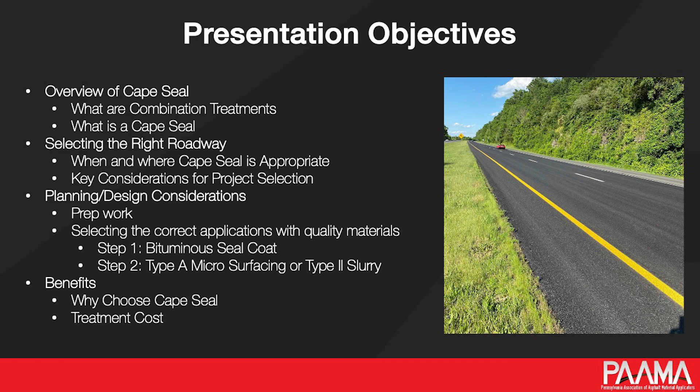With combination treatments, it's not that 1 plus 1 equals 2. Sometimes you do one or two surface preps and then combine it with another treatment. That might not give you double the life, but it's definitely going to give you longer life than if you just did one treatment on its own.

I think that's one benefit this organization brings to PennDOT, we have a lot of tools for you to pick from. The right tool might be based on the condition of the road, might be based on your budget. If you're looking for just a Band-Aid type approach, we have those. If you want something long-term with the exact right product for a road, we can guide you, we can help you pick the right product. But that's the key, picking the right treatment.

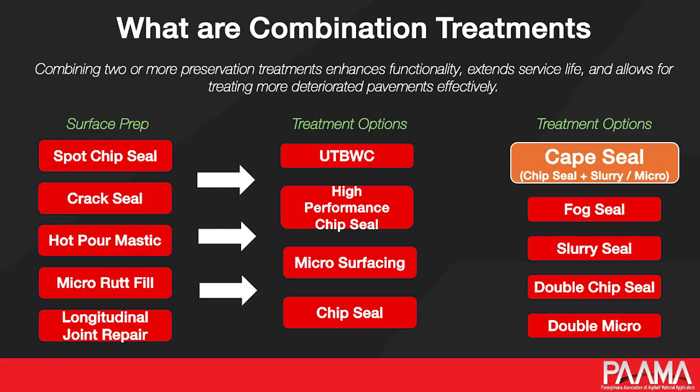Why do you want to use combination treatments? It's going to extend the life. If you're going to chip seal a road and you don't crack seal it first and you have wide cracks, those cracks are going to come back. So you want to use those surface prep treatments to extend the life of the maintenance treatment you select. It allows combination treatments to target multiple distresses.

So to give you an example, for a Cape Seal, you want to chip seal the road and cap it with a slurry or micro, but maybe that's not in the budget. Maybe you say, I just have these few areas that could benefit from a chip seal, so I'm just going to spot treat some areas and then do a single microsurfacing. There's a lot of flexibility based on the budget, the exact condition of the road, and the traffic. And I'd say one other thing is public perception.

Chip seal is the best bang for your buck, it covers the most ground with the least amount of money. But to be able to utilize that chip seal more, that's what a Cape Seal does for you. Now you can use that inexpensive chip seal in areas you wouldn't have considered using it otherwise, higher traffic settings or urban and residential roads.

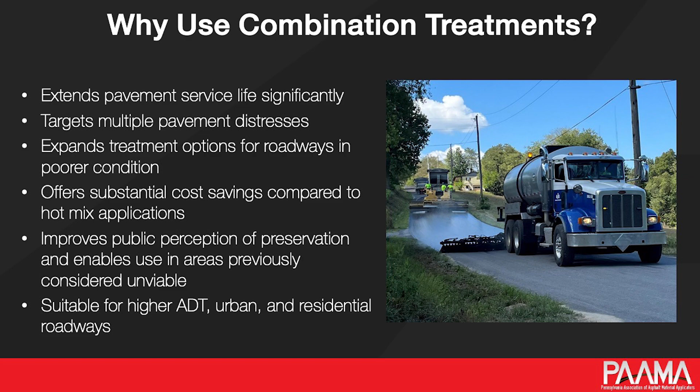But it's basically a two-step pavement preservation treatment. The first step is that chip seal, install the chip seal. Secondly, you're going to sweep it, and then cap it with a micro, or you can cap it with a Type 2 slurry.

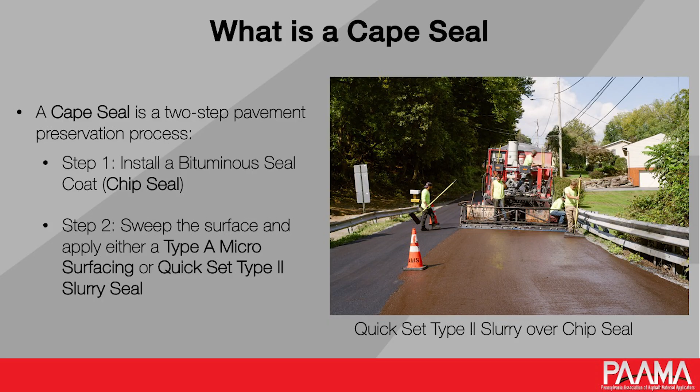The time between the two steps, different contractors may have differing opinions. If you're doing a conventional PennDOT chip seal with a number 8 aggregate, typically you'll like to see that chip seal sit for about a week till the stone gets a chance to embed, till you can sweep it, remove the loose aggregate, and then you could schedule to cap it after that time frame. Of course, everybody wants to cap it as quick as possible. You can speed that up, but I'll get into that later, maybe using a different type of stone that allows you to sweep it sooner. But typically, a week to two is what we like to see.

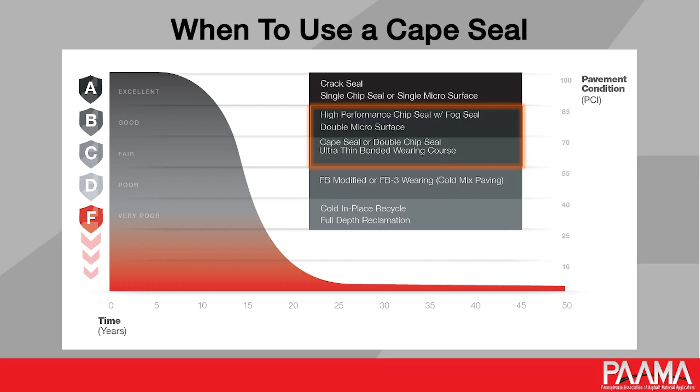Now we'll talk about when to use a cape seal. So cape seals, you're in that B to C range of condition of road. It's real similar type conditions as the ultra thin. The only difference is cape seal is not going to correct profile. So if the road's out of profile, then you're going to choose the ultra thin. If the road has a good profile, but needs a surface seal, and you don't want the chip seal look when you're done, that's when you'd start looking at a cape seal. It bridges the gap between a single chip seal and the ultra thin, it kind of fills that gap in between.

So in a perfect world, you're chip sealing your roads five, six, seven years after you pave them, or you're doing a single micro or some type of single maintenance treatment. If you let the roads deteriorate a little bit further and now there's more cracking on the road, that's when you're going to want to look to a two-step treatment, whether it's a double chip seal or whether it's a chip followed by a slurry or a chip followed by a fog. But you're not to the point where you need a thin overlay. So that's kind of the sweet spot for cape seal.

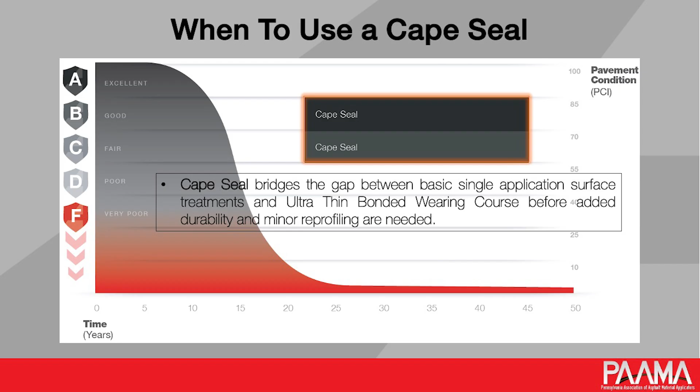These are road conditions, suitable roads. But like I said, it's similar to the ultra thin type roads. I'd say the difference is you want a good profile. A cape seal, when it's completed, will look like a paved road as long as the profile's good. If the road's out of profile, you really should correct that first or pick a different treatment.

So you could do a double micro, you could chip seal, you could do a double micro to try to fill the ruts, but then you just have to do the math and figure out, okay, well, till I chip and do a double micro, am I close to the ultra thin price? So that's where the math part comes into play, but there's a lot of flexibility in all the treatments that we do. So there's no right or wrong answer, but this just gives you more flexibility, allows you to use the chip seal in areas where you wouldn't have used it before.

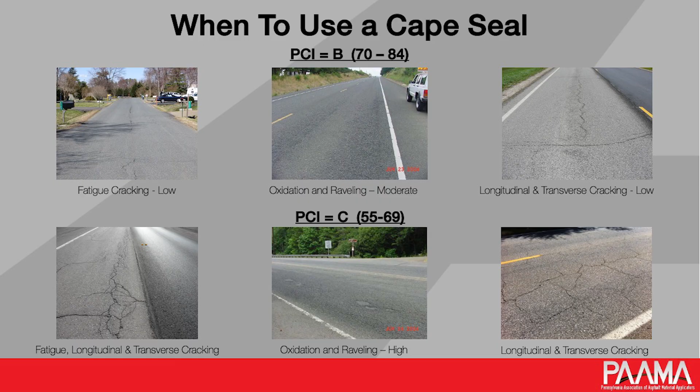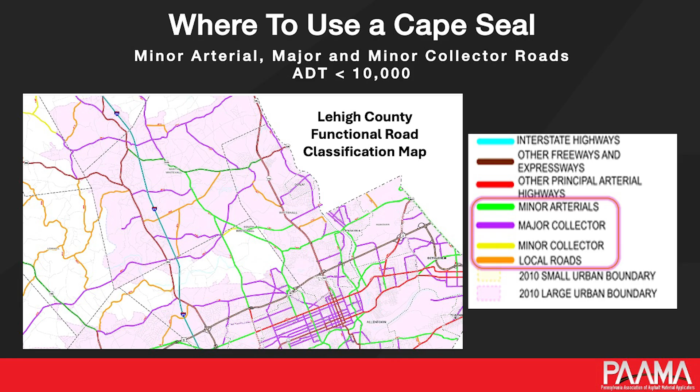You can do lower ADT roads too, but once you get to the lower ADT roads, the best bang for your buck is still the chip seal. So you're looking to expand the usage of chip seal, and the way you expand the usage is by capping it with something else. We say you can do a cape seal up to 10,000. It's going to depend on materials and the exact type of road you're doing, but I would say that'd be about the upper limit.

Here's some examples of where to use it. You've got a minor arterial road, might be higher speed traffic, more of a rural setting. That's a good example.

In Bucks County last year, we chipped and fogged Route 563. So if you think of your 3-digit SRs, a chip with a fog on a high ADT road works, but you could also substitute and use a cape seal, if you want a smoother finish when you're done. If you want something smoother that looks more like hot mix, then you'll go the cape seal route.

Minor collector road, that was a road in Berks County we did for Spring Township. A heavy residential, urban type setting where you get the benefits of the chip seal, but the aesthetics of the slurry and the micro. That's bringing the best of both worlds together. When you combine a chip seal with a micro, it helps to stop reflective cracking.

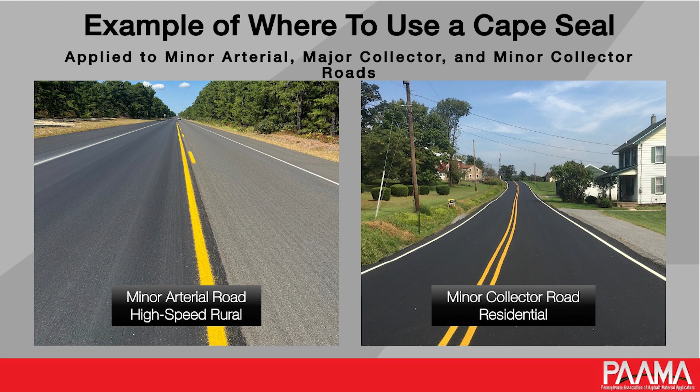If you did a micro on its own, you might be more limited. You want to target roads in the B category that have very little cracking. When you get to roads that have a little more cracking, you can still do the micro in those settings, but do the chip seal first. The chip seal is going to help stop those reflective cracks from coming back.

Working cracks are still going to come back. You can't stop a working crack, so if you have working cracks, you still should rubberize seal those. If they're wide, you're going to want to use the mastic. But all the fine cracks, they won't come back.

Another good place to use a cape seal is if you have a PennDOT road that goes through a town. If you pick any little borough, you've got a PennDOT street that goes to Main Street, that's a perfect type of setting, more of that higher density setting where maybe a chip and a fog on its own isn't as good because there's a lot of on-street parking. Then maybe you take a step up and cap it with a slurry.

You can do development setting roads too, so we do a lot of cape seals for local municipalities, for their development roads. Areas where they need a chip seal, but they don't want the headaches of the chip seal.

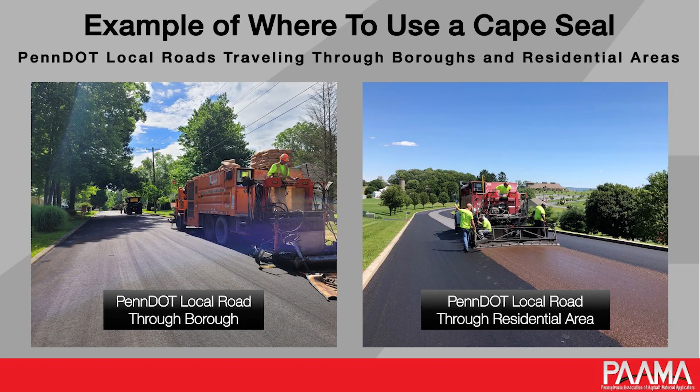As far as considerations, site selection, the key thing to remember is the limiting factor is still the chip seal. So you still got to be able to successfully chip seal that road. Give it time to be swept for the stone to embed till you can cap it with a slurry. That's why we say less than 10,000 cars per day, because you still got to be able to successfully apply that chip seal, sweep it, and then apply the slurry.

It's not a candidate if there's severe rutting, then you're not looking at the right product. If there's shoving or loss of profile, then you got to look for another treatment. Maybe you have to spot level some areas, or maybe it's an ultra thin candidate. So overall, you want the roads to have a good profile to be successful with a cape seal.

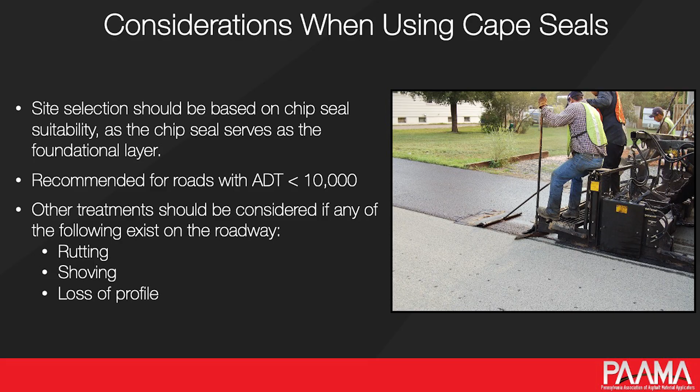Same prep work as ultra thin. Any areas that need base repair, mill and patch them with 19 millimeter. Rubberized sealer for any of the working cracks. Non-working cracks, you don't have to seal, leave those go, the chip seal will take care of those. Hot pour mastic for wide cracks.

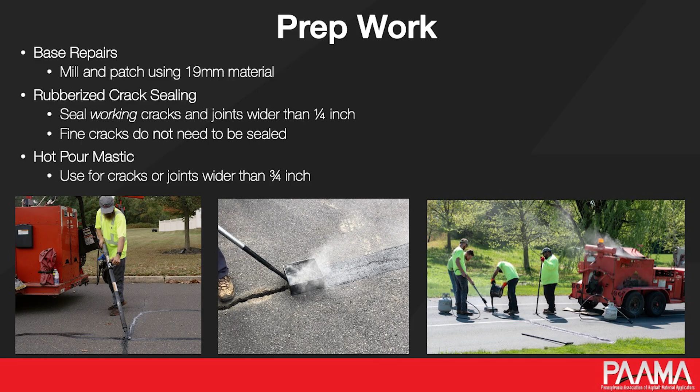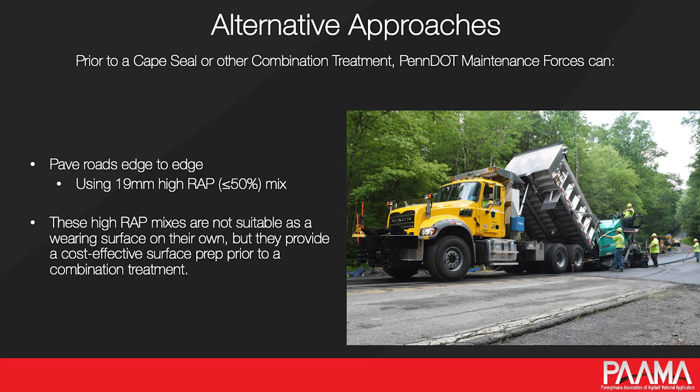Another good place you could use a combination treatment, whether it's a cape seal or a double application chip seal, is with the high-RAP mixes you've been experimenting with. You could use a high-RAP 19 millimeter Superpave mix and then cap it with a cape seal. You don't want to leave that high-RAP mix exposed, so you could use a combination treatment, whether it's a single chip with a fog, a double chip, a chip with a slurry, or a chip with a microsurfacing.

So how many number 8 aggregates are uniformly graded and cubical? Not too many where I live. So if you want a higher performing product, you have to advocate for higher performing materials.

I'd say on a cape seal for roads that get less than 3,500 cars a day, your AASHTO number 8 is a fine choice. There's not going to be any issues. You can chip seal that road, sweep it—traffic's low volume enough—cap it with a slurry, and a couple weeks later you're fine.

If you want to target your higher ADT roads and do that inexpensive maintenance treatment on a wider band of your network, you have to improve the quality of materials. Hopefully we can work together to make that happen.

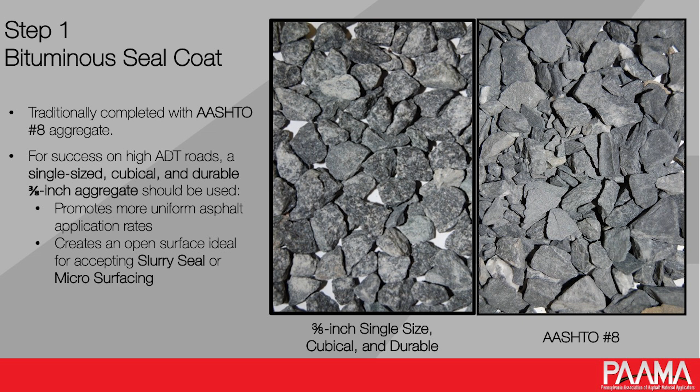But we've been having a lot of success using a single size cubical 3/8 inch aggregate. It's readily available—any producer that produces an SMA, that's a single size cubical aggregate. Any producer that produces the ultra thin bonded wearing course is producing that single size cubical durable stone. So the key is just getting it clean enough to use for a chip seal.

By using that durable 3/8 cubical stone, you have a uniform application rate. With chip seal, you're always trying to pick the nominal size of that stone. So if you have an AASHTO 8 with a 1/8 inch sliver stone, it's going to take a lot less oil to glue that to the road surface than if you have a larger stone that's 3/8 of an inch. So as a chip seal contractor, you're trying to pick the median.

If I glue the small one down, maybe the big ones won't stay. If I try to glue the big one down, it's going to bleed in the wheel tracks. That's the reason you can't use an AASHTO number 8 as-is on high ADT roads—you're going to have bleeding in the wheel tracks, or if you don't have bleeding, you could have stone loss on the edges.

So you want to use a uniformly graded stone where all the aggregates are a similar size, so that way your application rate of emulsion and the design method works. If you ever read the chip seal design method, it's based on aggregate being single size and cubical. That's the only way the method truly works. So we're big advocates of that.

That works with cape seals too. So I'd say on your roads that are 5,000 to 10,000 ADT, if you want to cape seal or fog seal those, consider using a higher quality aggregate.

Then you get to step 2. The benefit of using that cubical single size stone is you truly can sweep it the next day. By using that uniformly graded stone, we can apply a little bit more asphalt emulsion to glue that rock down and successfully sweep it within 24 hours. Once you sweep it, that's when you can cap it with either the micro or slurry.

There's a little personal preference there. I would say you'd utilize a type A micro on higher ADT settings, or if the road's slightly out of profile. Because the difference between the micro and the slurry is with the micro, you can stack aggregates, so you can lay that lift at 25 pounds.

If you have a road with a truly good profile, you can get away with the type 2 slurry, because personally, it's like the benefits of chip seal, and when you have that cubical rock, you create that macro texture. Now you're just using that slurry or micro basically to fill the voids of that chip seal. So laying the slurry or micro any deeper adds no benefit if you have a nice profile. That's our take - we do a lot of type 2 slurry for our cape seals, but on occasion you can use the micro.

So it just depends on ADT and condition of the road and what the existing condition is - what the rutting is on the road.

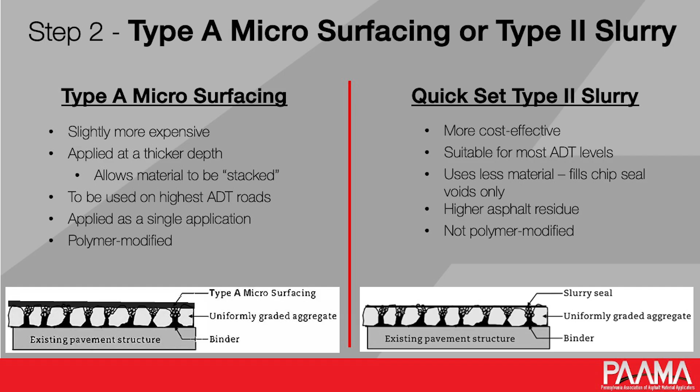But the main difference between a slurry and a micro is the slurry is not polymer modified. With the chemistry, we use a quick set slurry, so the set time's the same whether we use a micro or the slurry system. Truly the difference is the depth. With the slurry, you're laying it thinner, you're not stacking that aggregate. It's not polymer modified, it is a little more asphalt rich.

It's another reason we use a type 2 slurry, especially on the low volume roads - you get a better seal. That slurry is a little more forgiving because there's more emulsion in that mix compared to the micro mix. But on your higher ADT roads with some wheel rutting, you're going to want to use the type A micro to cap that chip seal.

The benefits of the cape seal and approximate cost - I would say you're probably $5 to $6 a square yard. Every job's different, every location's different, but just to give you a rough idea, a chip with a fog seal is maybe $3 to $4 a square yard, depending on the setting and aggregates. The next step up in cost and product would be the cape seal at $5 to $6 a square yard. Ultra thin, we didn't talk about price there, but you're probably $8.50 to $9.50 a square yard.

So you can see that all three of those products are used in similar settings, but you have options - options in price, options in the finished surface. Look at the surface you get: you get the sealing qualities of a chip seal that we all love and know work, but you get the surface texture of a microsurfacing.

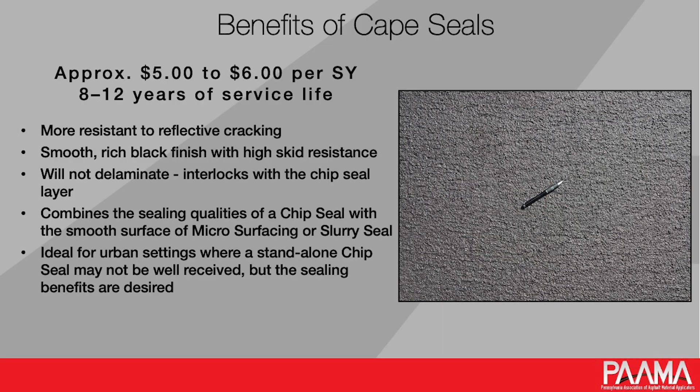So you get that smooth black finish that Chris was talking about in all his micro slides. You get that finished surface when you're done, as long as you have a good profile. That's the key - the surface of the microsurfacing always looks better, always looks more uniform if the road has a good profile. Once it's out of profile, then you have to rut fill it first to get a uniform depth of material you're laying, or if the ruts are too deep, maybe it's not the right choice - maybe you're picking the ultra thin.

But this is a very good solution. We're excited that PennDOT wants to try to get a Cape Seal spec adopted - a workaround for all our local municipalities who've been using liquid fuels to pay for this treatment for the past 12, 13 years we've been doing it. They'll bid a single bituminous seal coat per the 408, and then they'll bid the type 2 slurry per the 408. So just combining the two makes the Cape Seal.

So I think it's important to get a spec, because when you combine the two, there are things you have to consider. You wouldn't want one contractor doing the chip seal and one doing the slurry, because then you get people pointing the finger. So having one uniform spec makes it clear about the timing. Another thing is with line striping - you don't want to wait more than 2 weeks to cap the slurry. So if you have one contractor, he can do the chip seal, sweep it, and cap it with the slurry, so you get your lines back within 2 weeks. So it'll be good to get a PennDOT spec.

Anybody have any questions?